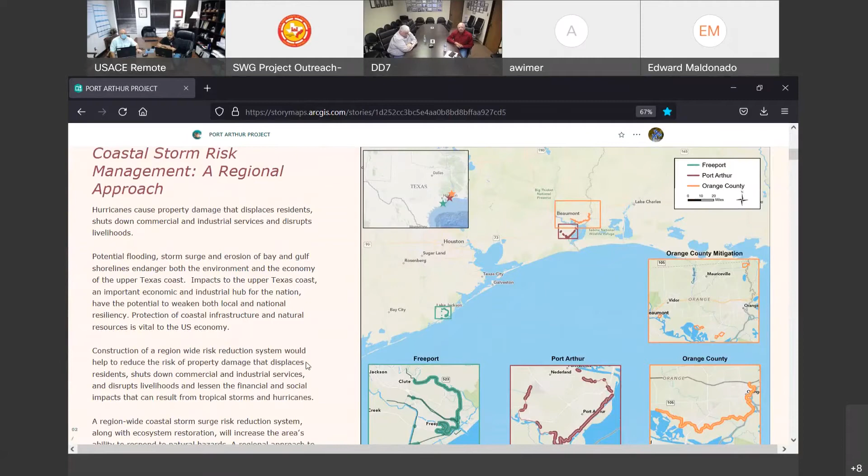This color-coded graphic represents various projects that make up the Corps' mission. Starting in the northeast corner, you can see the beginning of the Sabine Pass to Galveston Bay program, which includes, in orange, a completely new system, Port Arthur in blue. It looks like the site's missing the... Oh, there we go. Port Arthur is there, and okay, so orange is in the northeast corner.

It's a completely new system. And then Port Arthur's in blue. And we're upgrading this system, making improvements. And then Freeport in red to the southwest. This all makes up the Sabine Pass to Galveston Bay program.

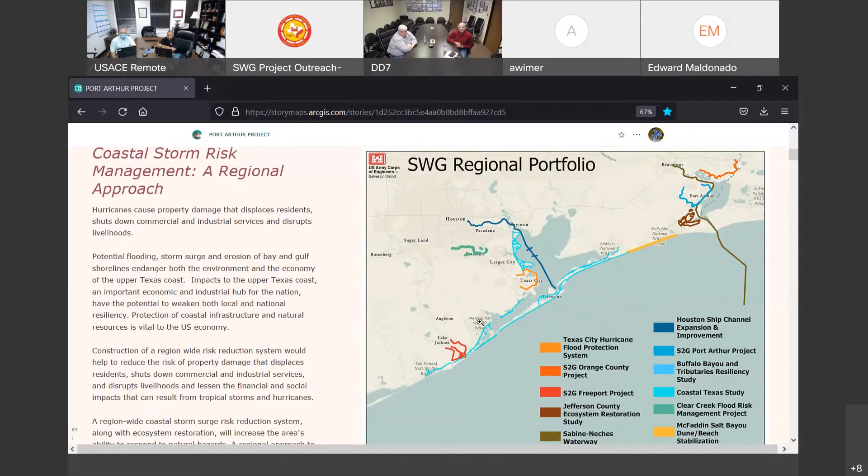Now, if you go eastward from Freeport, you can see in light blue the Coastal Texas project, which was recently signed and endorsed by the U.S. Army Corps of Engineers, Chief of Engineers. And these projects together will provide multiple lines of defense for the Texas Gulf Coast. This is a regional approach to storm surge risk reduction and our effort to mitigate erosion of our bay and Gulf shorelines.

This system of systems risk management strategy will increase the region's ability to be prepared and withstand storms and maintain the region's critical infrastructure for years to come. When tropical storms or hurricanes impact the Texas coast, the immediate fallout and the continued aftermath affects not only the people who live in these coastal counties, but also the entire nation. It is critical that we take action now to avoid the destruction that these future storms could bring.

That's why Congress has given us this important mission, a landmark mission, to be proactive rather than reactive, as we have taken many lessons learned from Hurricane Katrina and we're implementing them in our project.

Now, through the Bipartisan Budget Act of 2018, Congress authorized and fully funded all three of these projects: Freeport in green there, Port Arthur in maroon, reddish color, and orange, to move forward and begin pre-construction, engineering, and design, or what we call PED. Following PED, we move into construction. Port Arthur was funded for $863 million, and we signed the project partnership agreement in November of 2019 with Jefferson County Drainage District number 7.

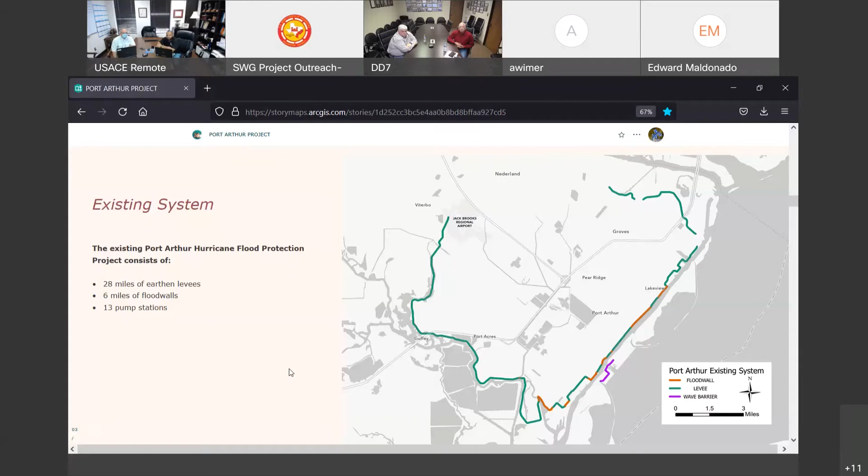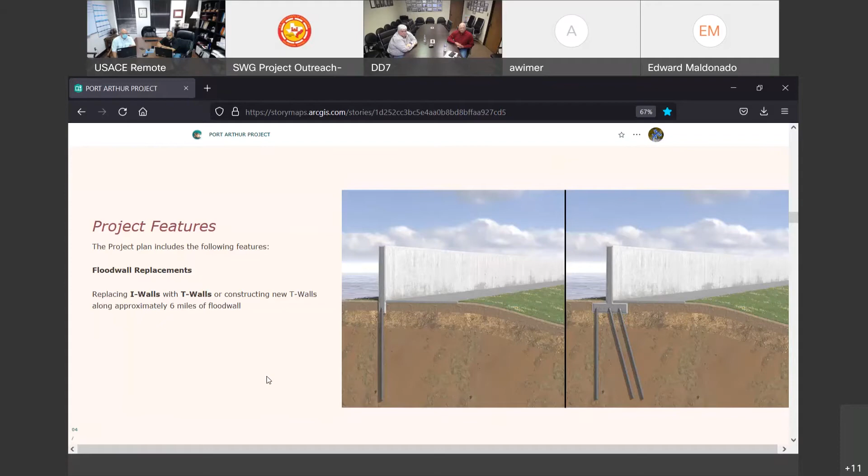I'd like to talk about some of the main features of the project, or some of the main ways the project will be improved. So we'll be replacing 6 miles of concrete or steel I-walls around the system. And as you can see on the left, the structure is shaped like an I. We're replacing these I-wall structures with stronger T-walls, as you can see on the right, shaped like an upside down T with multiple structures below. These updated design T-walls are significantly improved to withstand barge impact and increased pressure caused by higher water levels. This is one of the lessons learned from Katrina.

Another project feature includes raising of approximately 6 miles of our existing 28 miles of earthen levee and the creation of a separate 1,830-foot earthen levee in the Port Neches area. And the graphic on the right details a 1 to 2 foot raise, but in some cases we'll be raising the levee up to 4 feet. When raising the levee, the amount of real estate increases as the footprint widens.

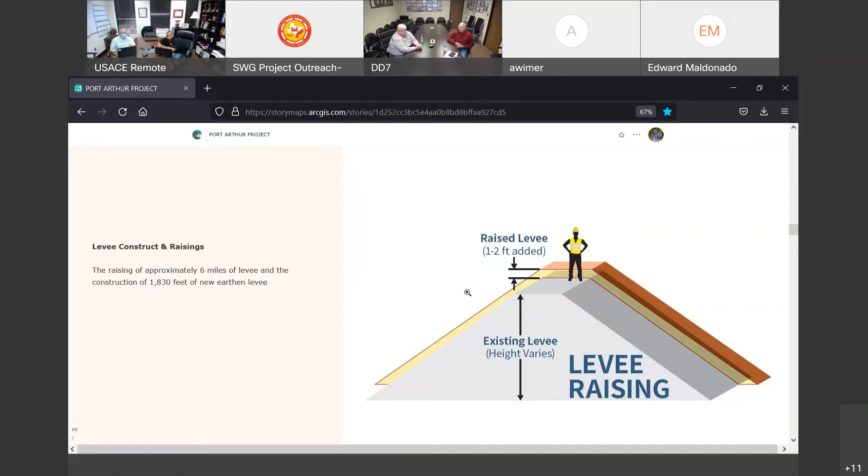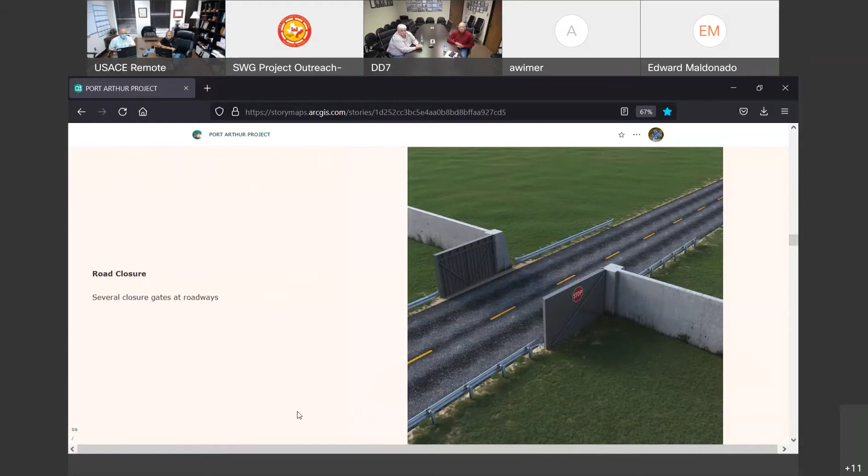Next up, we'll be going around the system and replacing and looking at road closure structures. And these are gates that will be open for the majority of the time, but prior to a storm surge event, Drainage District number 7 will go around and verify and close all these gates. Additionally, we'll have railroad closure structures similar to road closure structures. They'll be maintained open most of the time, and during a storm surge event will be closed. And as you can see on the right, they'll be sealed to protect the inland.

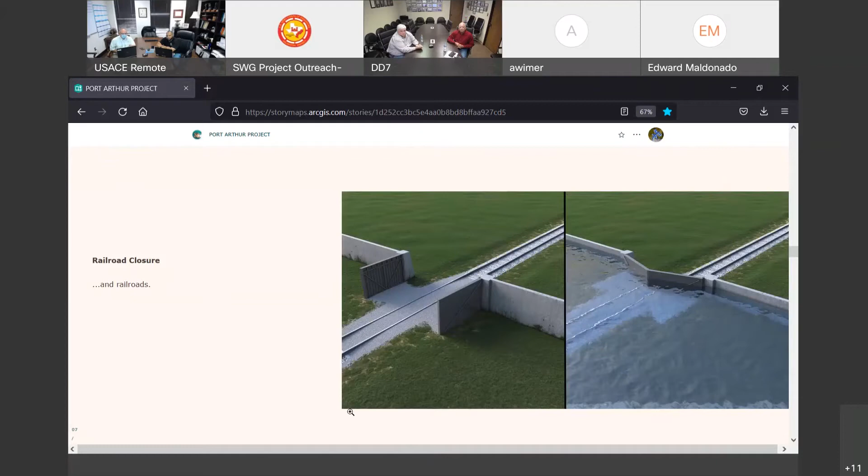So, project schedule. Right now we have one project that is in construction that started in 2020, while the other sections are in the pre-construction, engineering and design, or PED phase, as I mentioned before. Construction of the remaining sections of the Port Arthur system is scheduled to start between 2022 and 2023, and we anticipate being complete by the end of '26.

Bobby will go into further detail on the following slides, but I'd like to mention that during the PED phase, detailed engineering, technical studies, designs, environmental compliance, and the identification of real estate needed for the project will be complete. The Port Arthur team will consider many factors, such as engineering best practices, environmental impacts, and potential benefits and impacts to residents and businesses throughout the project. We look forward to engaging with the Port Arthur community as this project moves forward.

Thank you. Oh yeah, one more slide, sorry about that.

Project funding. This project was fully funded by Congress in 2018 for $863 million. The project is cost shared at 65% federal and 35% non-federal, sharing the cost with Jefferson County Drainage District Number 7. At this time, I'd like to turn it over to Mr. Bobby Van Cleve, our lead engineer, to discuss the contracts in more detail.

All right, thanks, Charles. Good morning. My name is Bobby Van Cleve. I am the lead engineer for the Port Arthur project, and I just wanted to let everyone know that the Corps of Engineers Galveston District has assembled a multidisciplinary team made up of many subject matter experts and engineers from all over the Corps, established to solve technical issues and develop high quality design and engineering products.

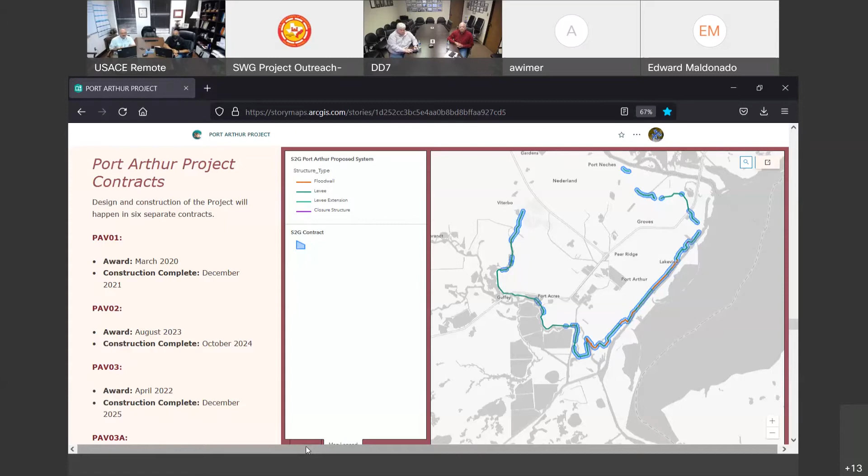The levee improvements that we are talking about here have been broken up into several separate contracts because of the size and scope of the work involved around Port Arthur. This was primarily driven by feedback we received early on during the feasibility and other studies from industry. So I just wanted to help the public understand the amount of work and separate contracts that are going to be involved with the project.

But first, before I get into the specific contracts, the award schedules and work going on with each separate area of the Port Arthur levee system, I wanted to give a sense of the complex issues and the technical and engineering solutions being developed to resolve them. First, I want to mention the enormous effort that's been made to schedule and phase the separate work involved with these contracts.

There's going to be interaction and separation of the contracts along the alignment at different locations. So it's imperative that our team phases that work in a way that makes sense, continues to provide a level of protection around the system, and maintains that sense of engineering control.

There are also quite a few pipelines and efforts to relocate different pipelines around the system, and depending on the alignment of the levee, there's also existing municipal infrastructure and municipal and telecommunication lines that we have to work around and through, with those separate entities. So it's a work in progress of how we incorporate the existing infrastructure into and around the system.

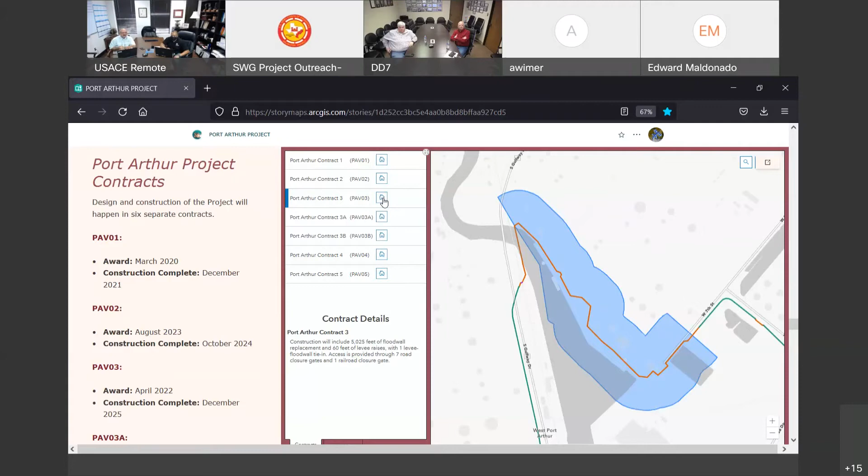Then following and connected to 02 is contract 3, and it is within the Valero refinery near the turning basin south of the refinery there, and it's in the final design phases, and it primarily consists of flood walls, and the award date is planned for April of next year, 2022, with a completion date of December 2025.

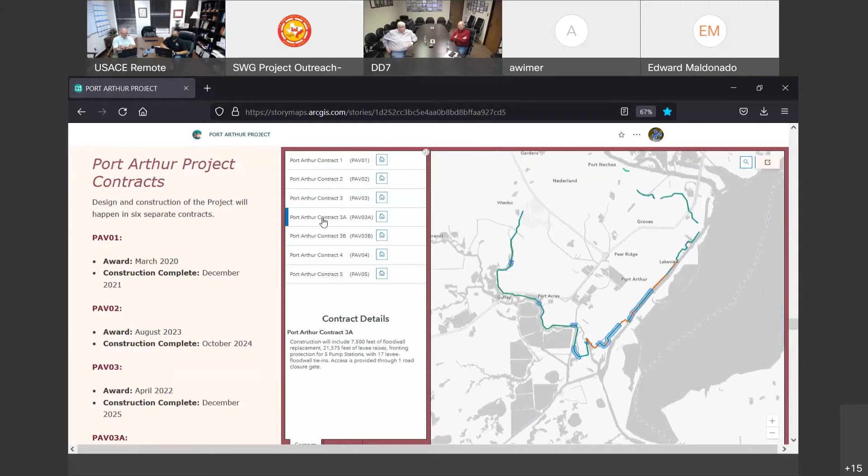3A, this contract has various locations in and around the Port Arthur area. A large portion of it is along the Sabine Pass waterway near the Boardwalk and Lamar College, which runs from Rose Hill to Houston Avenue. And so it's in the design phase. It's pretty far along, and it involves both levee raises and flood walls and closures with this contract. It's planned for award in June of 2022 with a completion date set at November of 2024.

3B, as we continue on, it's near the Port of Port Arthur and the Kansas City Southern Rail Yard. And it's in final design phase right now, consisting of levee raises and flood walls and some large closures in that area due to the railroad systems that are in place. Planned for award in March of next year, 2022, with a completion date of January 2024.

PAV04 is another one that's located along the Sabine Pass waterway, north from Rose Hill to the Veterans Memorial Park. And this is primarily a flood wall design there to replace and augment what's there in place, and to provide better protection in that area. Scheduled for award in April of 2023, and the completion date is estimated at October of 2026.

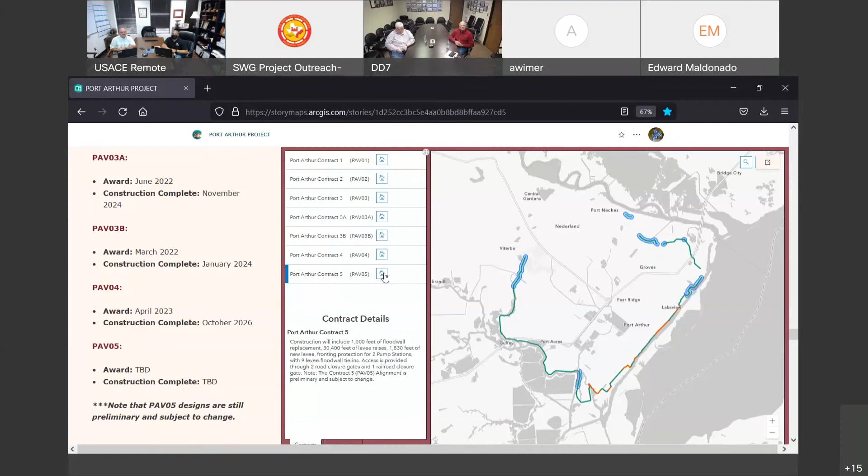So with that, I want to turn it over to Michaela to let her discuss some of the real estate requirements and issues. Thank you. Thanks, Bobby. My name is Michaela Kinsey. I am one of the realty specialists assigned to this project from the Galveston District Real Estate Division. Today, I will be briefly describing the Real Estate Division's responsibility and roles in the design phase, or PED phase, of this project.

The right of entry packages that the real estate team creates include the right of entry document itself, as well as a signature page, a description of the types of surveys and investigations that would take place on the property, a map showing the impacted property, and a contact information form.

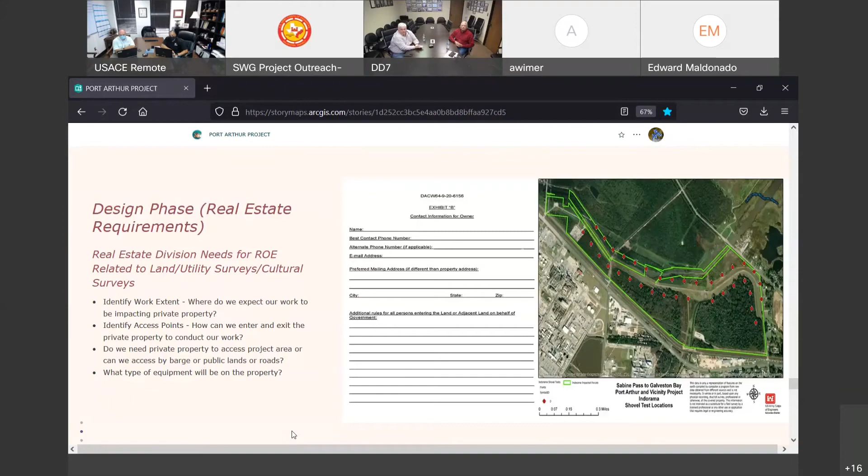Upon design completion and identification of all real estate needs for the project, DD7 will be issued a notice from the Corps to move forward with land acquisition. DD7 is responsible for acquiring all the lands needed for the project. All land acquisitions will follow the Uniform Relocation Assistance and Real Property Acquisition Policies Act of 1970. At this time, there is no home or commercial relocation assistance anticipated for this project.

While some of the lands outside of DD7's existing right-of-way will be needed for the project, we will be working within their right-of-way as much as possible. When acquiring lands for the project, an appraisal report will be done to determine the fair market value of the property. Property owners will have the opportunity to accompany the appraiser on this inspection, and property owners will be offered the fair market value of the property. That concludes the real estate portion of the presentation, and I will pass it back on to Kelly.

Before we open it up for the public engagement Q&A session, I wanted to make you aware of a website that we have put out on the Army Corps' main page down here in Galveston, where you can get information about the entire program, as well as each individual project that's being designed and constructed therein. The page includes information about not only the project background, but information about the upcoming public info sessions.